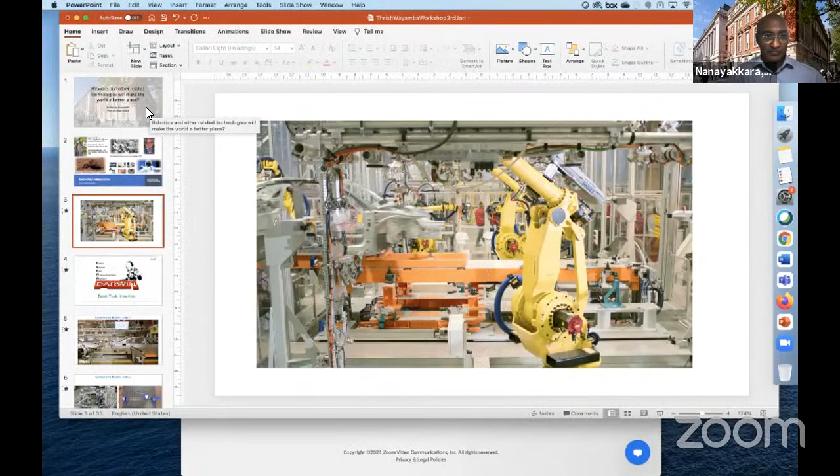It's great to be here to talk to school students in Sri Lanka. It's always a pleasure and a privilege to do that kind of thing from outside Sri Lanka. Congratulations to the Royal College Science Society for organizing this event, and being very generous to share this with other students in Sri Lanka. That's a good leadership activity.

So I'm going to talk about robotics, and I'm generally going to talk about soft robotics, which is my field of work. I will give some insights about what is happening in soft robotics these days, and then give some ideas about how you can continue work and studies in that area in the future.

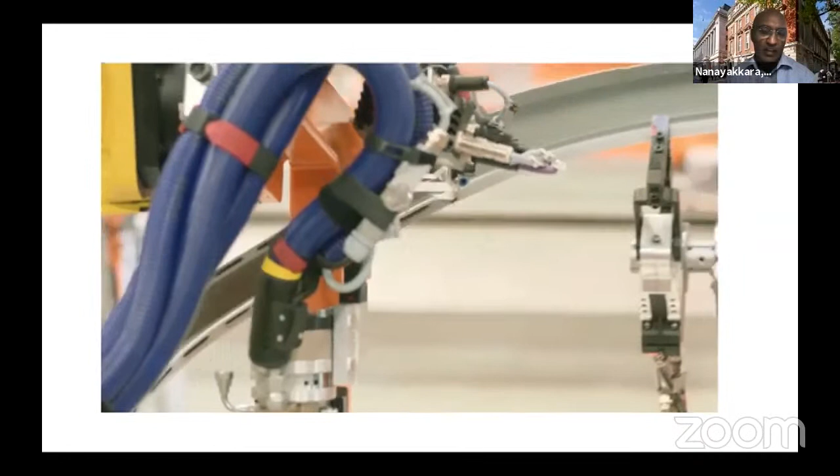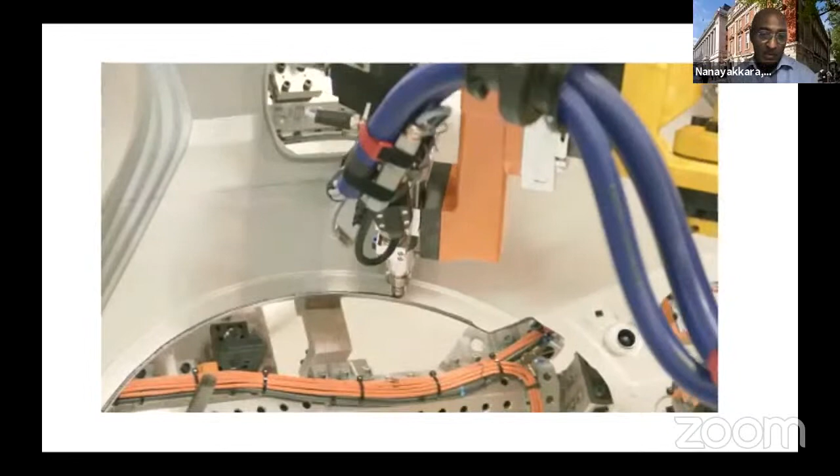So the point here is that there's a demand and supply driven uptake of robots. People need products and services that are calibrated and manufactured according to standards. It doesn't matter how many cars you are making, each car should have the same quality. It is true that handmade items are expensive, but handmade items are expensive when there's no huge need for calibration, right? So like hand looms are expensive, which is great.

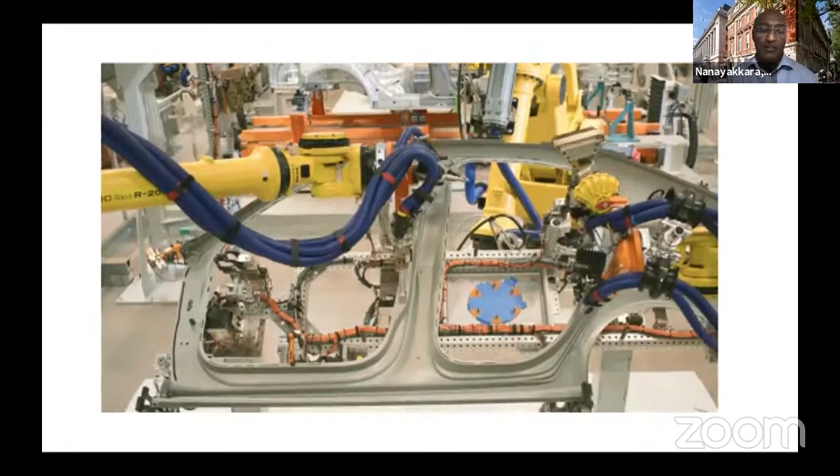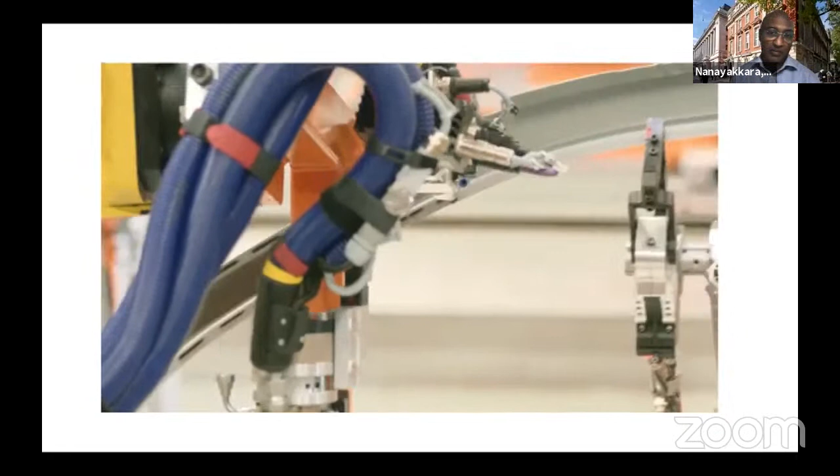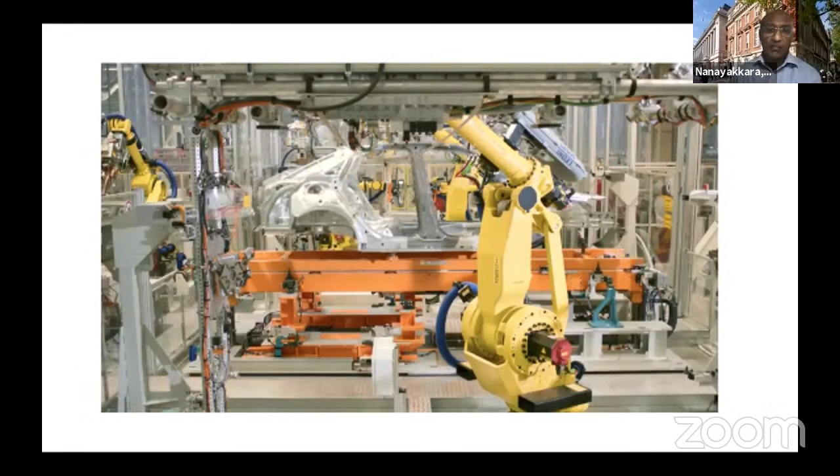These textiles can have a little bit of variation across different products, giving a unique taste and texture to each item they are manufacturing. So that is great. But if it is a car or an automobile, you have to be sure that these things are manufactured to some kind of calibrated standard, and that is why this was taken up in the car manufacturing industry and other assembly mass manufacturing industries more than the others.

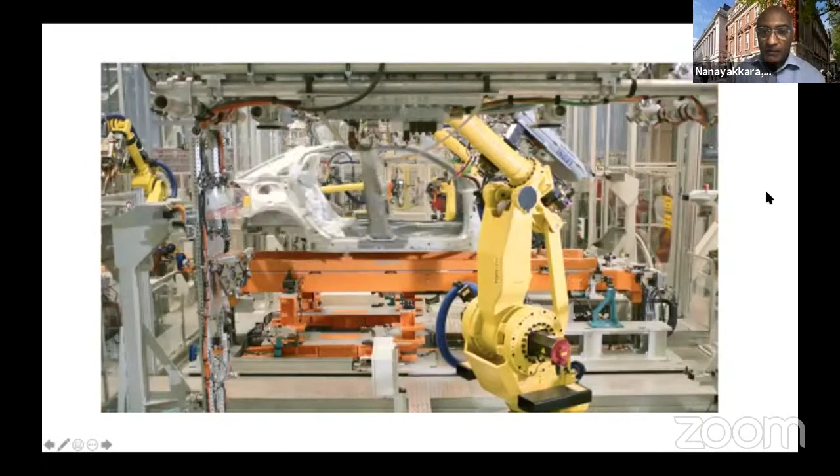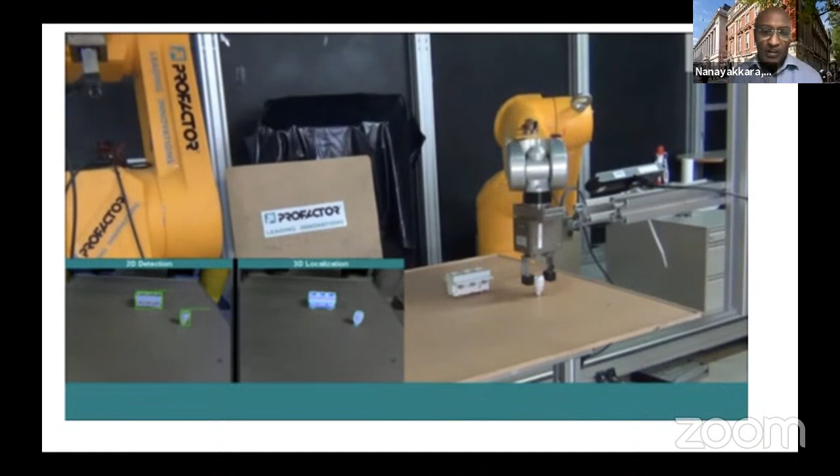But there were drawbacks. So this is one example. In these environments, objects move around, and these calibrations fail sometimes, and these robots have to survive with uncertainty.

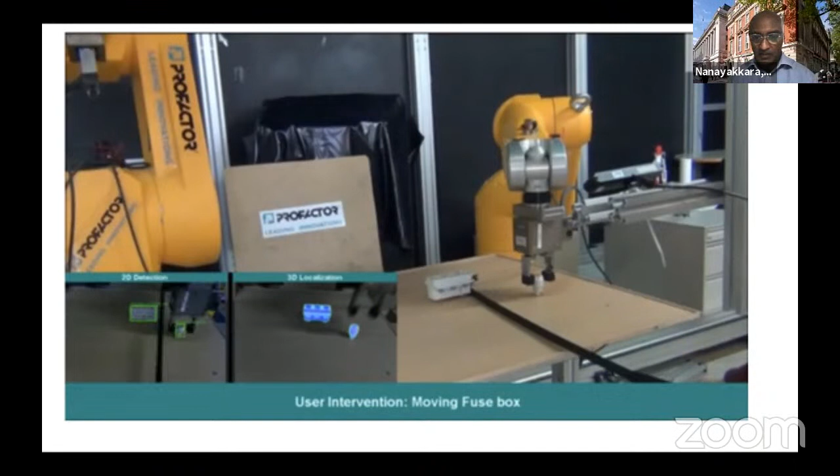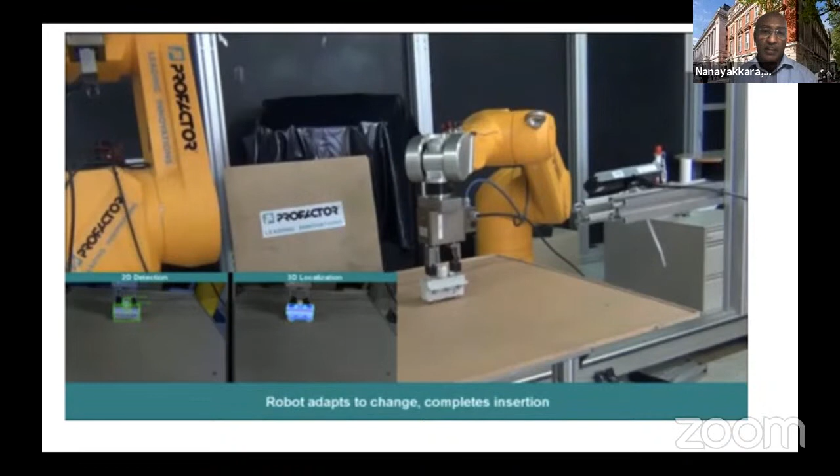This is a European Union funded project I was involved in, done in collaboration with lots of different European partners. The idea is, if a robot picks up something, and somebody moves it, or due to some reason that object moves around, then the robot should be able to recover, recalibrate itself quickly, and get the thing done. So this is like extending their intelligence a little bit.

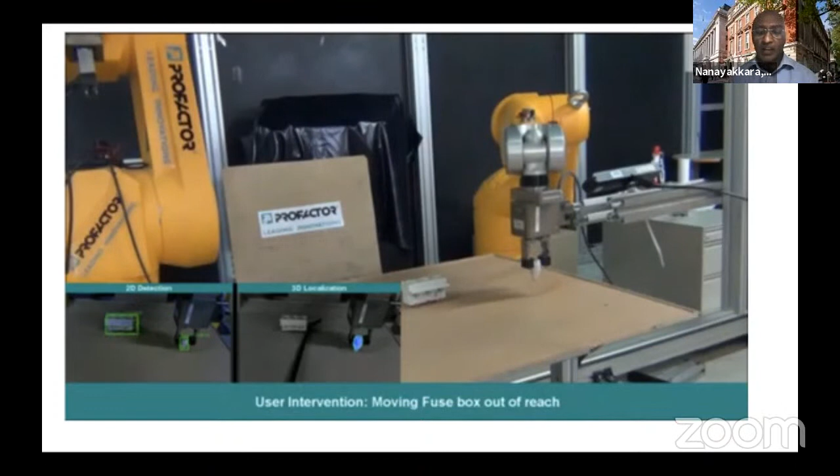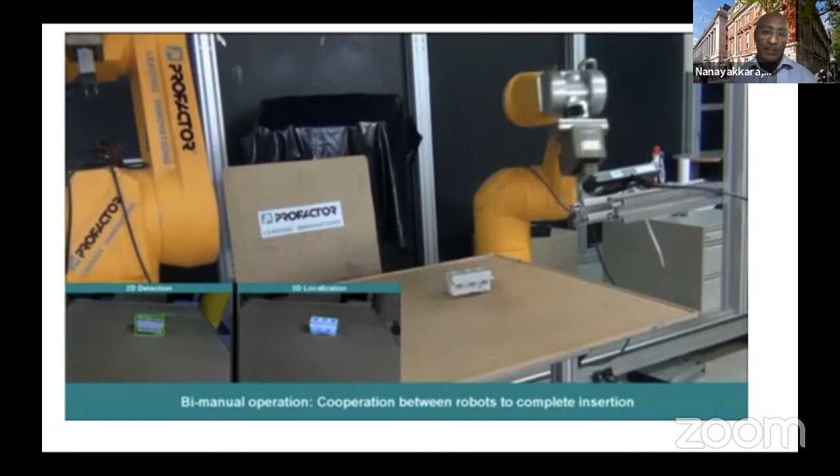So what happens if the object is moved beyond recovery, to a bigger distance where the robot either cannot reach or cannot accurately calibrate? Then another robot, a buddy robot, can come and help them. This is more collaborative intelligence, one robot understanding the difficulty of his colleague robot, and responding in an adaptive way. So this is how we push the boundaries, the state of the art.

So this was a research project, but it was adopted in the industry. This is the latest kind of incarnation of these robots, called cobots. The cobots are collaborative robots. It is purposely not called robots because these are collaborative robots, and these joints are safe.

So you can have humans working around them, and these robots can collaborate with humans and other robots. This allows humans to come in and do more tailor-made, customized interventions, while the robots can continue to do their work and easily recover from different uncertainties. So they have what are called series elastic actuators.

So you can see, compared to the first video, this video shows humans working around robots. This is really needed because this human touch is really important in any manufacturing task. They have to do ongoing quality assurance, quality testing. This man is coming to check if the robot has done the job right, and they can do certain interventions that the robot cannot do, or just help the robot to recover things and do the task better.

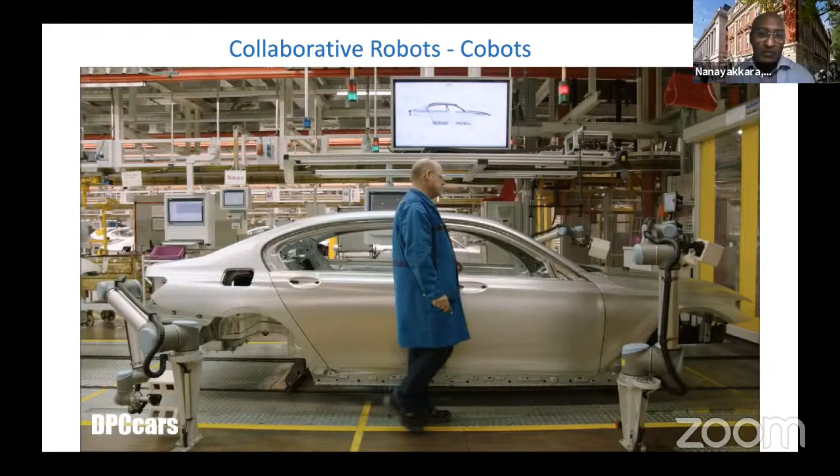So if that laborer was doing some mundane work like nut fixing or polishing, why not get this robot employed to do that work? Then you recover the cost of the robot in one year, because you were anyway paying the person $20,000.

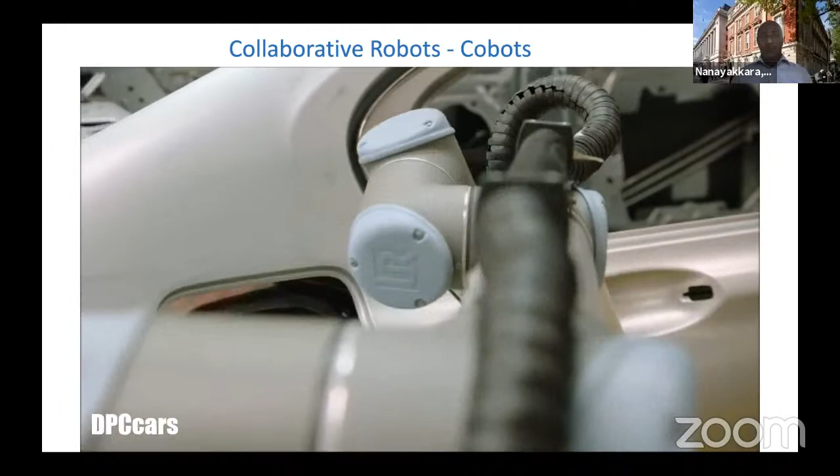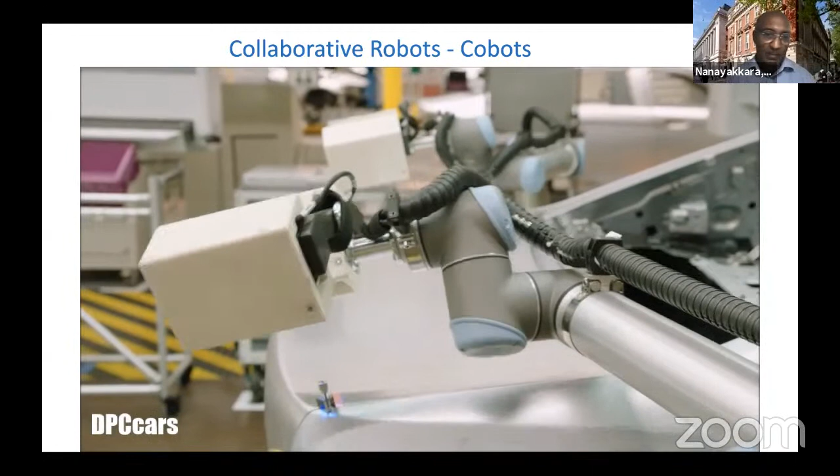This can appear to be that these robots are replacing low-end workers. There's an ongoing debate about it. But the thing is, there are not enough workers to do this kind of job, so the industries cannot really depend on labor mobility to sustain manufacturing and agriculture.

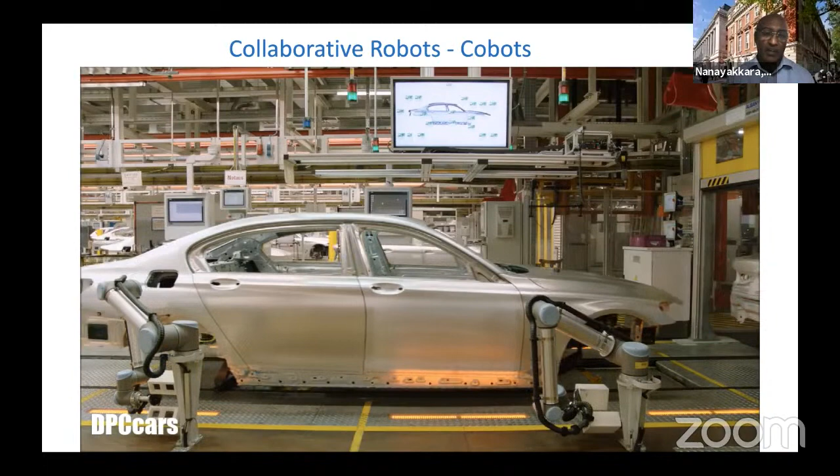Most European countries, UK is experiencing that kind of problem. This is not just agriculture, the strawberry pickers and apple pickers - there are not enough people to work in those industries. And recently we experienced a driver problem, the truck driver problem.

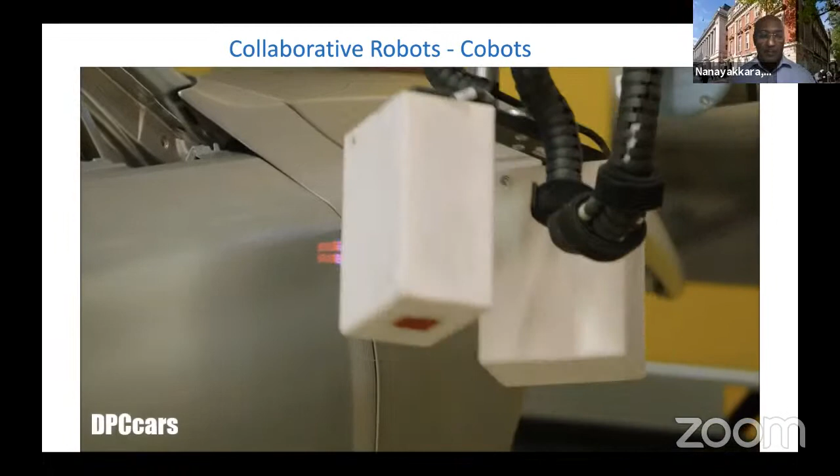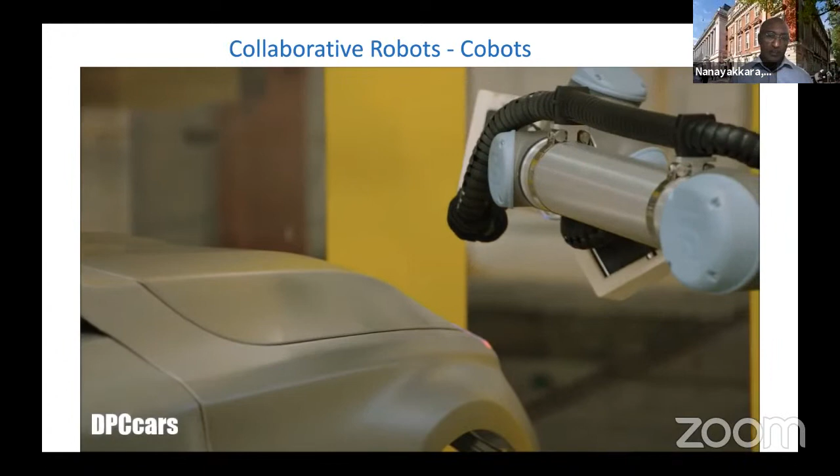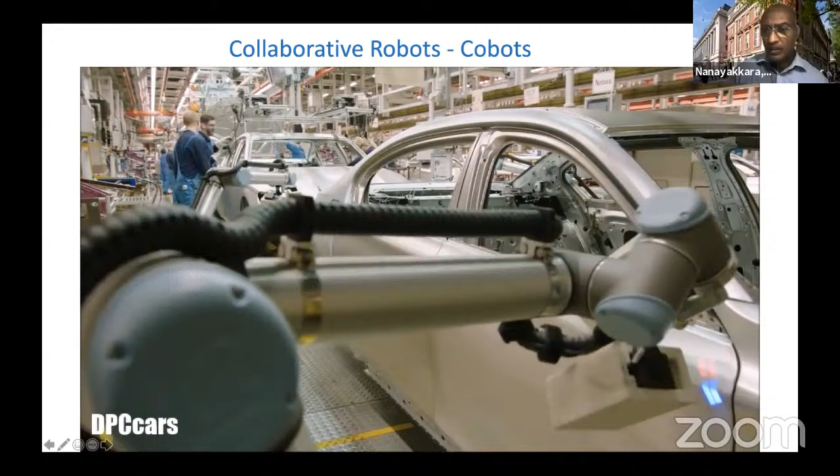That lack of people to work in those industries creates the demand for autonomous driving or cobots. So it is not like robots replacing humans, or creating joblessness, or taking human jobs - it is not really that. It is that there are not enough people to work in those industries, and the robots are coming to serve that demand. That is something I really wanted to highlight.

So these robots have, as I said, series elastic actuators. There's basically a motor, and it is connected with springs to the load, and then you can just push the robot - the robot is not going to push you back too much.

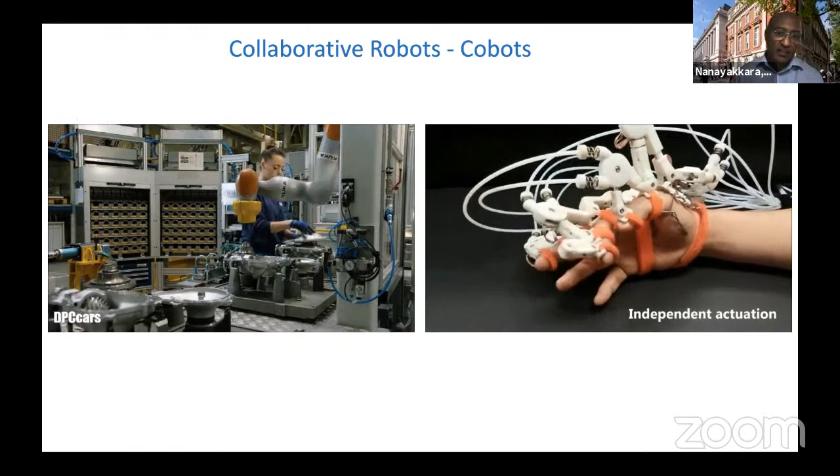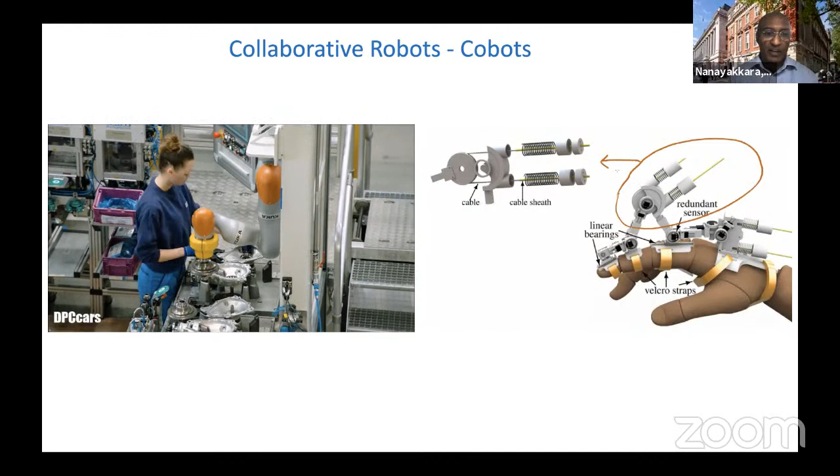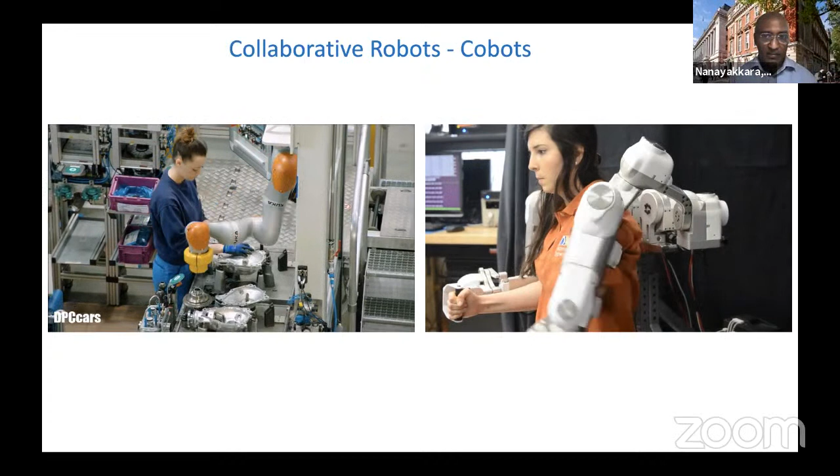You can see that lady is working alongside that robot, that KUKA robot, which is a cobot, and she is feeling very comfortable working around that robot. She's not even looking at the robot. The robot is helping her pick things and placing things in the right orientation so she can just do the final fitting or reorientation.

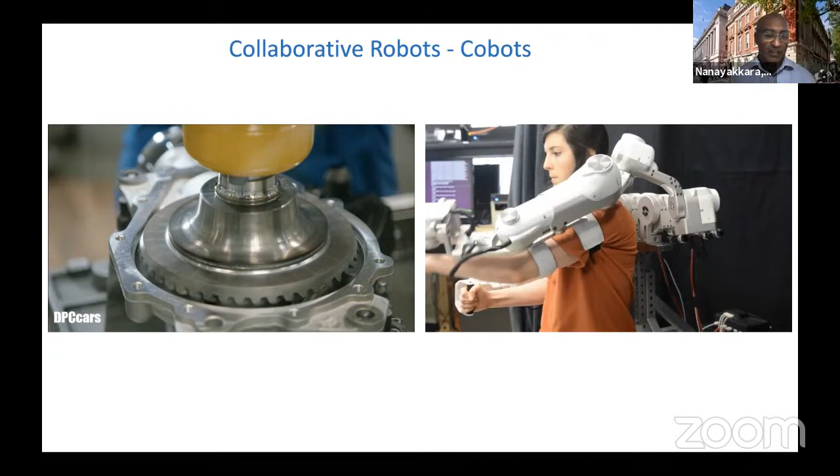This is massively increasing the efficiency of her work, because she doesn't have to lift heavy objects. The robot is lifting the objects and doing the repetitive things, and she is doing just enough work to get it done - that last bit of human touch.

So this is the state of the art, and it is laboratories like mine and lots of other laboratories across the globe who are pushing the boundaries of this technology. So it is our job.

Lots of companies are being spun out every year from different universities. For example, Imperial College London has spun out at least 16 robotics companies so far, and it is continuing. Our research, at some point, we do fundamental research, and at some point it comes to maturity, and then it goes out as a company.

There are lots of elevated floor houses in the UK - these houses are elevated, with a gap between the ground and the floor, for insulation purposes or for heat and other problems. These are relatively old houses that didn't have good enough thermal insulation. This robot can go underneath those floors and do a proper calibrated surface insulation. You cannot send a human underneath - the gap is so narrow, and it is not a comfortable area to work in. And the chemical they are using is not very good to be around a human.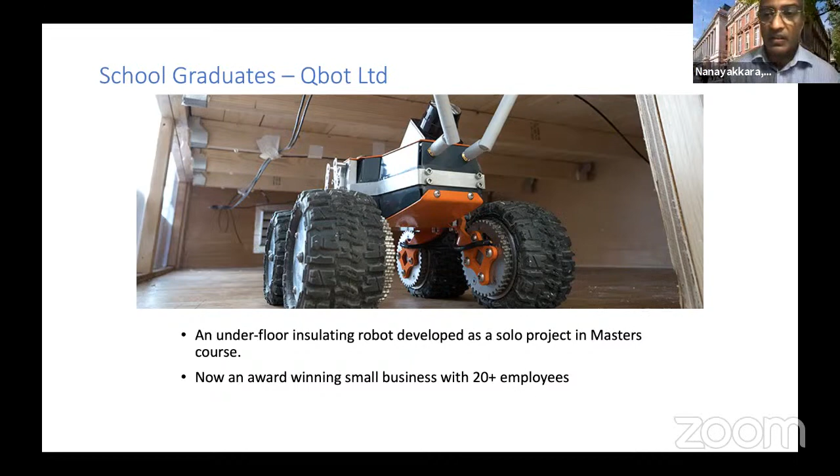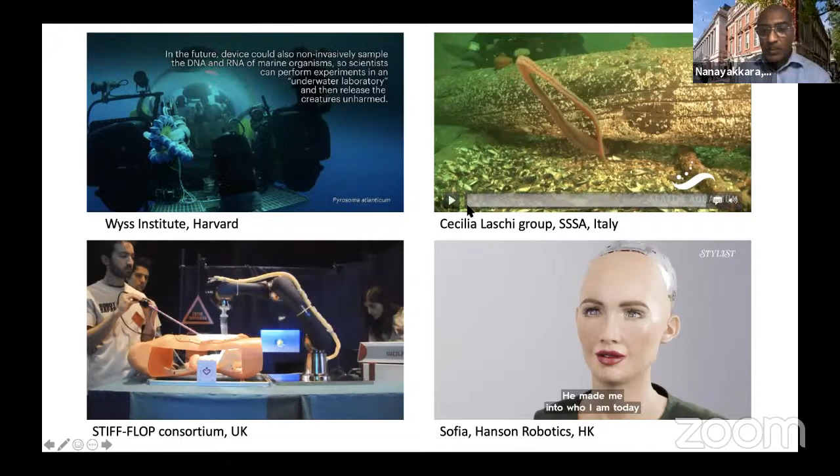So the soft robotics field is a fascinating field. I'm involved in that, my research is on soft robots. The soft robots are mostly motivated by, inspired by, soft animals like the octopus. The octopus can have tentacles, and these tentacles can be stiffened, and they just do lots of different things under the sea.

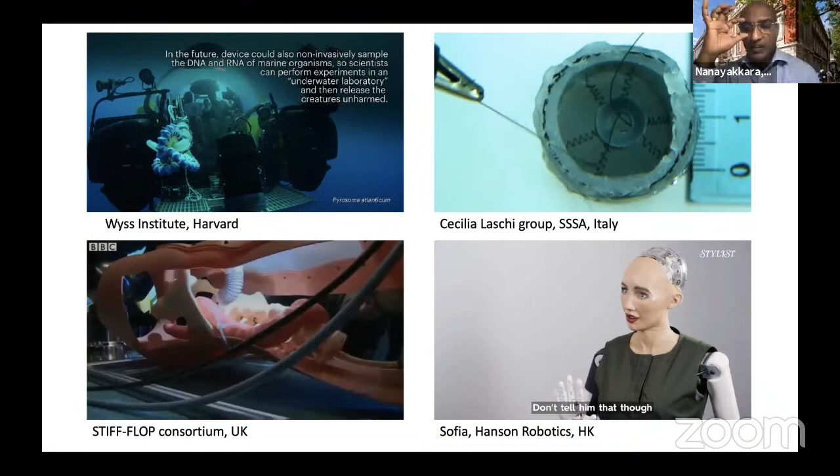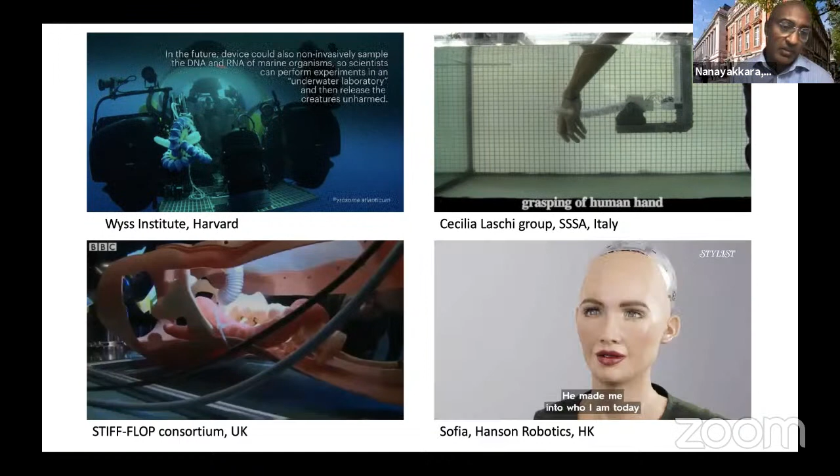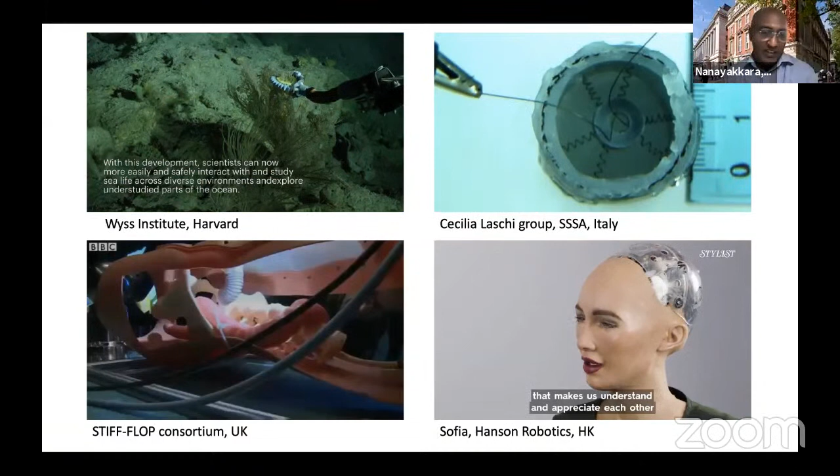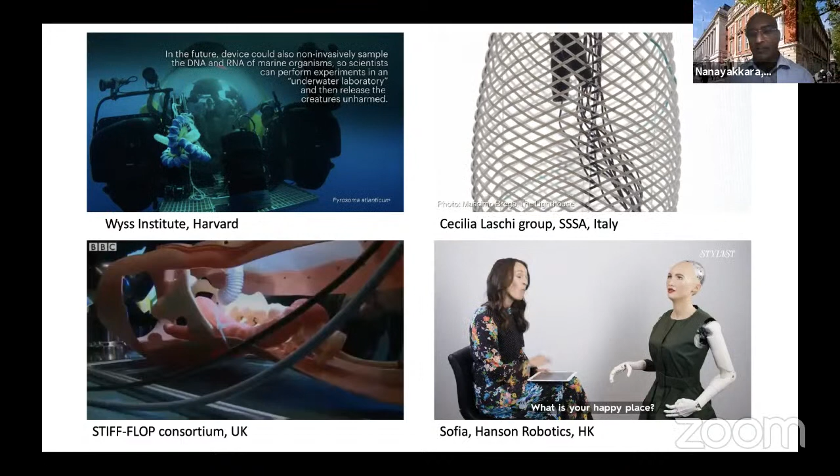So the hope is that for those listening to this talk who are school students, by the time you go to university and come out of the university, maybe in about 4 or 5 years time, you will be in a society with lots of opportunities in robotics, with lots of companies around and different opportunities to work.

So the essential thing is that you need to be very good in mathematics, you need to be very good in physics, and then you need to know your coding—software skills.

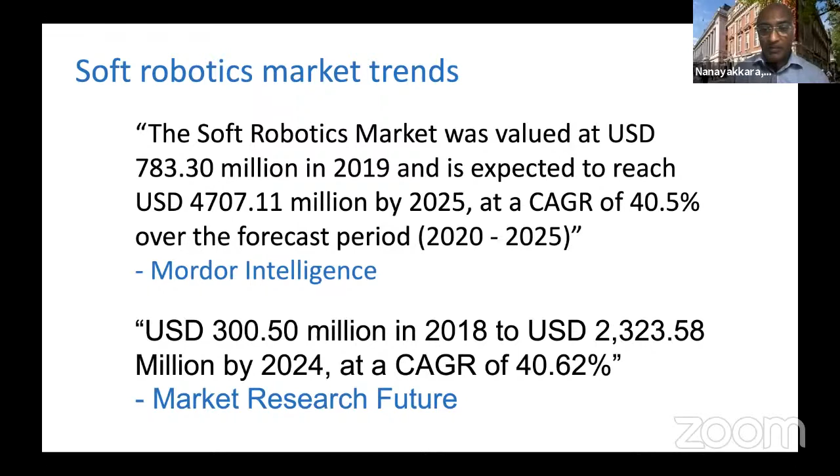Within the Imperial Robotics Forum altogether, we have current ongoing funding of about 50 million pounds, 64 patents, and 16 robotics companies coming out, plus lots of other scientific activities. So just to give a quick run through about the soft robot laboratories, starting with George Mylonas's lab.

His lab is working on minimally invasive surgery, especially gastrointestinal surgery. His robots can go in the gastric tract and do intestinal observation and surgery. He is developing soft robotic anchoring - cylindrical anchors that can go into the intestine or gastric tract, mostly the intestine, then inflate and latch onto the inner surface, and the robot can go through that anchor to do the surgery.

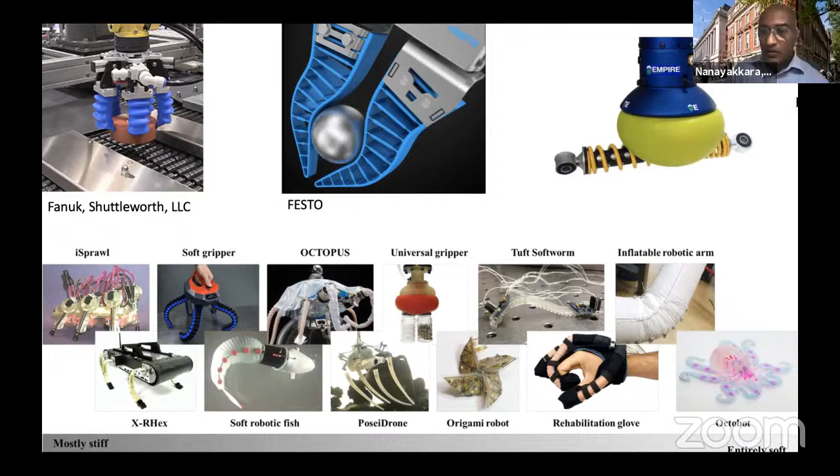These odd-shaped objects cannot really be calibrated, so the advantage of soft robots is that they can just wrap around the objects - you don't need a huge plan, calibration, or complicated program to handle them. For example, this robot is just a soft sack of granules. You push it against an object, it passively wraps around that object, then you suck the air out, which freezes that shape, and that becomes your grip. This is one example - the MIT robotic fish.

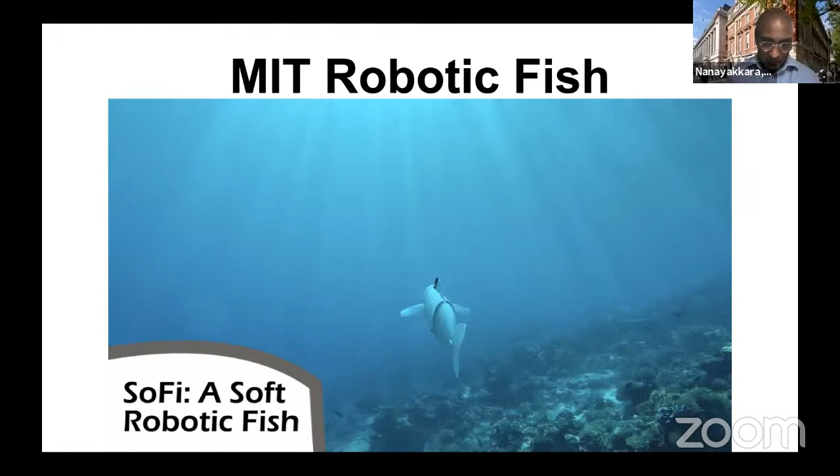This robot is tethered and remote controlled. Just to be clear, it is not fully autonomous.

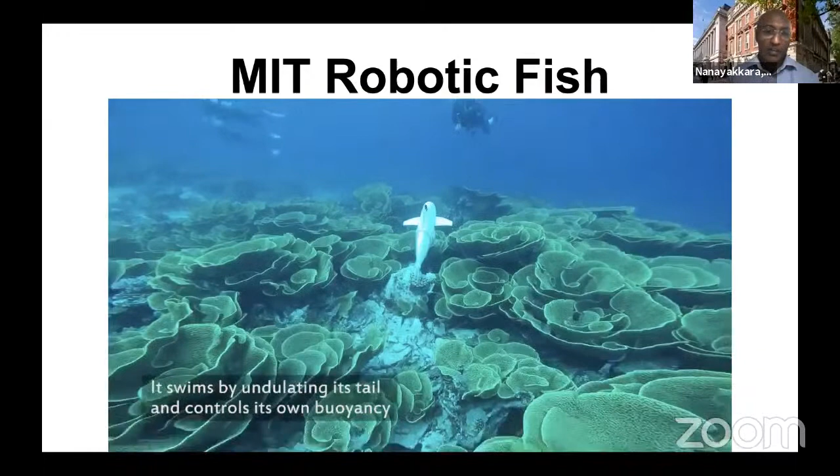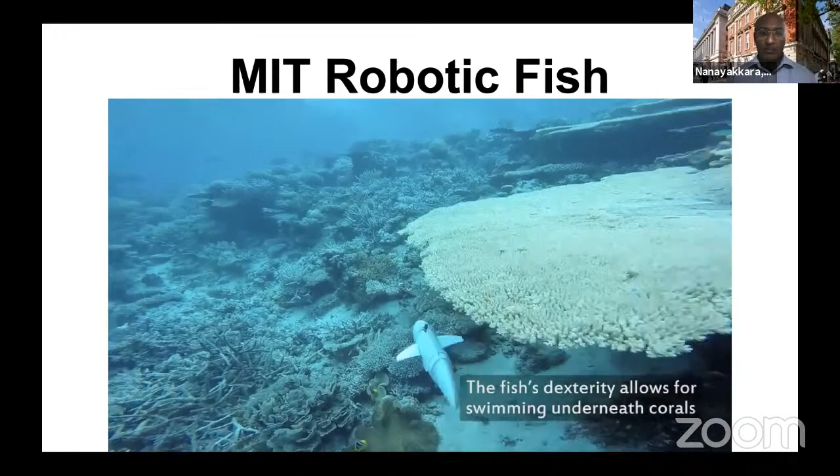These kinds of robots can be used for underwater resource monitoring or pollution monitoring. I think in Sri Lanka they could even be used for underwater tourism, taking nice videos underwater to promote tourism, monitoring underwater resources like seaweed, and even helping fishermen locate fish. There are lots of things you can do with these kinds of soft robots.

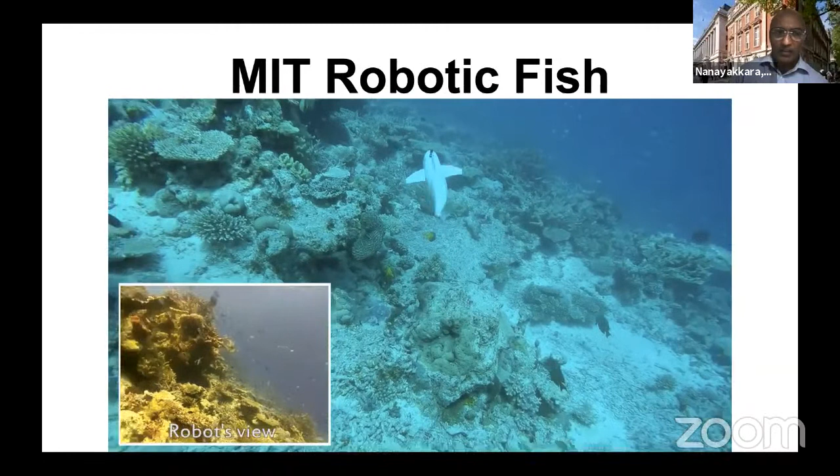We went to this hospital, and they have so many farmers coming in with wrist injuries. So they apply this kind of orthosis to restrict the wrist. But when the farmers or patients go home, sometimes they develop pressure points, because the skin and fat layers grow, but the orthosis remains the same, and that creates these pressure points.

These are really uncomfortable, especially after several weeks of wearing it. So the idea was to develop a soft sensor skin underneath that can monitor this kind of pressure point development. We designed it so the sensors are located in the statistically highest pressure point development areas under the hand.

So we took data from patients, went through a lot of complicated steps, and developed this special soft sensor.

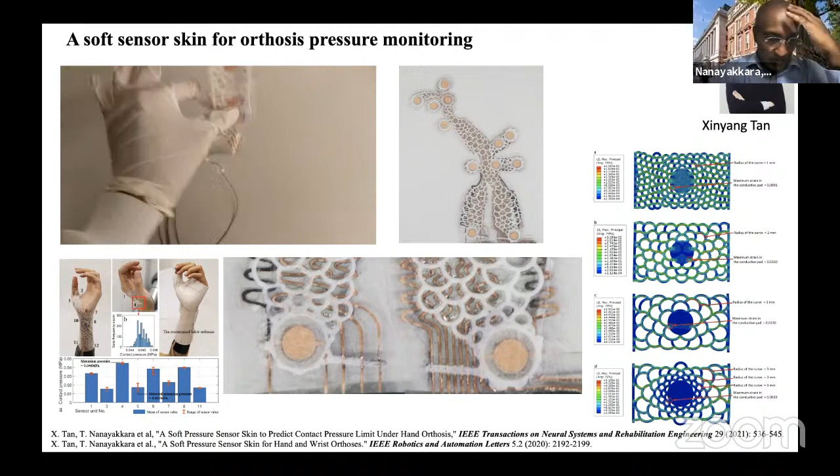The next step is to remotely send a command signal back to the orthosis, which has a thermal coil. Because this material is a low temperature melting point thermoplastic, you can warm it up to a comfortable region, not dangerous to human skin. Human skin is about 36-37 degrees Celsius, and you can go up to about 40-45 degrees without damaging it, and just release that pressure. But we haven't done that yet, so that's the next step.

This is Sara Adela Abad Guaman. She also finished her PhD in my lab. Her work was to understand how mountain goats survive on mountain cliffs, and to see if we can get inspiration to develop robots that help farmers do farming in very hilly environments. She is from Ecuador, and wanted to help Ecuadorian farmers that way.

But we went back to the very fundamentals to understand how these animals survive on those cliffs. The idea was that it may not be the brain doing the job.

If you think about it, the signal from the hoof to the brain takes about 120 milliseconds to reach, and any calculations in the brain take about 50 to 100 milliseconds. Then the primary motor cortex has to send commands down to the muscle fibers to move, and those commands take another 100 to 200 milliseconds to reach and amplify in the fibers to make any movement.

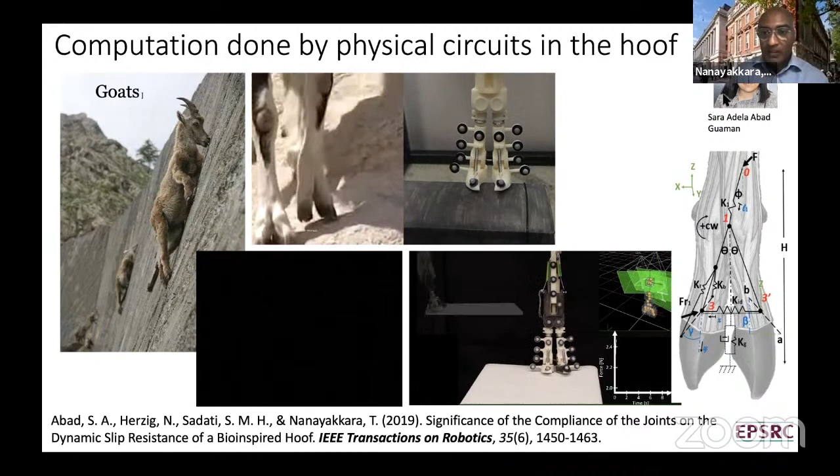It's very interesting to notice that even humans, when they want to brake on ice, like Julia braking on ice — the friction coefficient between ice and those blades is fixed, so friction coefficient alone doesn't explain how she's braking. She is implementing a goat-like hoof with her hip joint — she goes down a little with bent knees, then rotates the hip and ankle joint to create a physical shape that looks like a mountain goat hoof.

This is a behavioral implementation of the same thing, and the goat hoof is an evolutionary implementation of the same principle. So the principle remains the same, and there can be multiple different implementations. That is one thing I wanted to highlight.

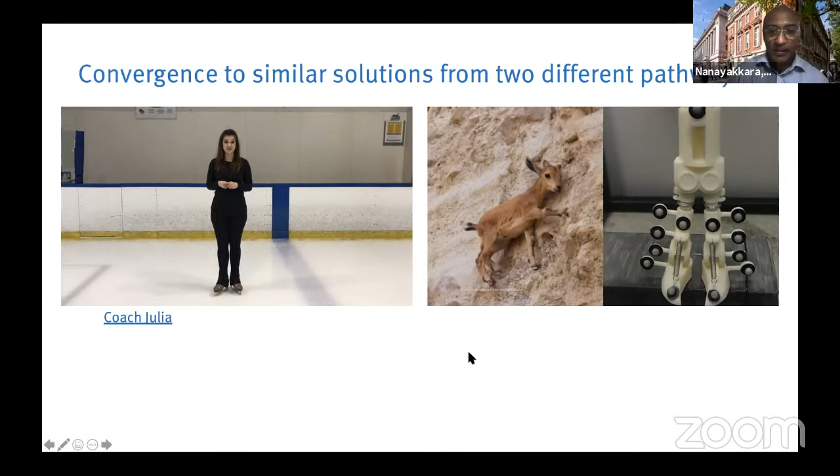So another PhD student, Elham Hamid, tried to understand how our knee joint is solving problems. The hoof was solving the problem of slip reduction, and our knee joint is solving another very complicated problem: noise reduction, right?

You might have noticed that when you ride a bicycle on bumpy, wild terrain, you wouldn't stay seated — you come off the seat and ride with bent knees, and your thigh muscles pull together in what we call co-contraction, implementing some kind of mechanical filter.

Filters are things seen in electronics and mechanics — the name implies they filter out unnecessary noise. So what the brain does is implement a mechanical filter at the knee joint, so the knee joint takes care of filtering out the bumpiness of the terrain, so the brain doesn't have to deal with that. The brain can just keep riding the bicycle, while in the background the body solves very complicated problems of self-stabilization — and that way the brain solves it.

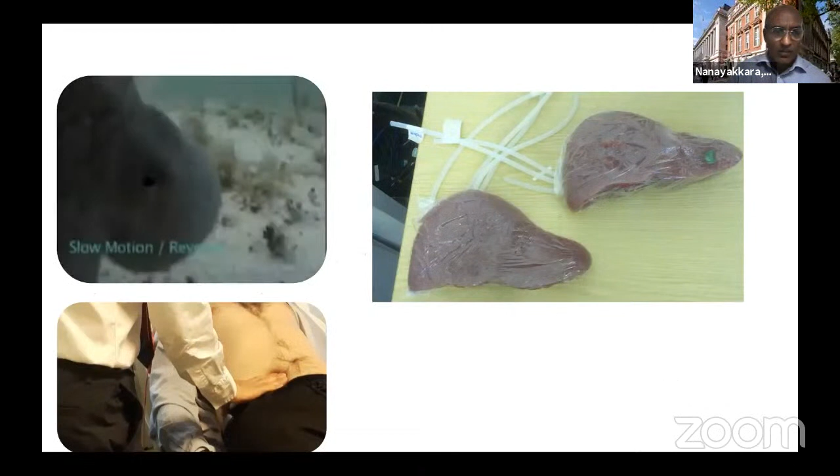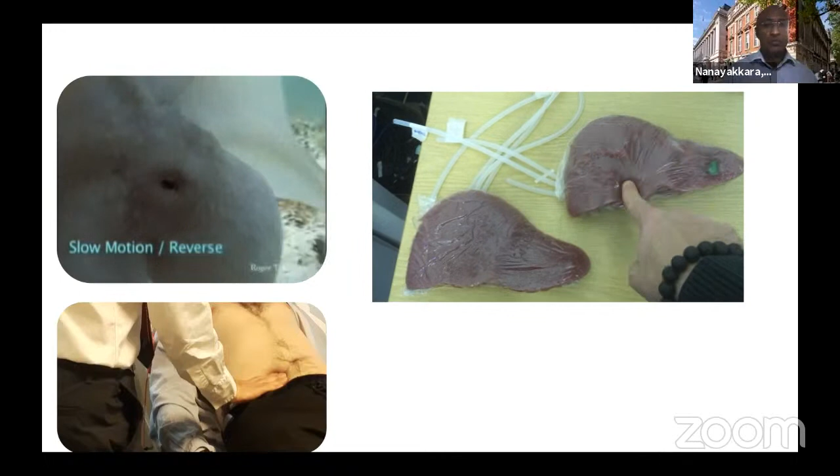Another project I'm involved in is this Robo Patient project, about a dream of having a robotic patient in the hospital, so that we can use that robotic patient to teach medical students how to examine a patient. In the far distant future, we want to project a patient from home to the hospital physically, to a robotic body. So you have your human body at home, and you're sick but don't want to go to the hospital, so your physical body can be projected to the robotic body, and the robotic body will try to camouflage your body and present it to doctors.

This inspiration is coming from the octopus. You can see this octopus, see how it camouflages itself.

See how this octopus is camouflaging itself to seaweed. Within a few seconds, it is becoming a seaweed. See how that animal could camouflage. So we want to do the same kind of camouflaging in a robotic body.

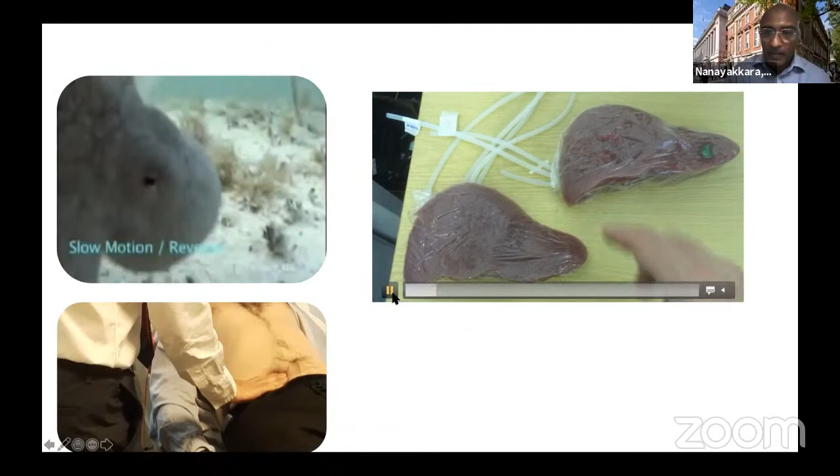So we are developing these robotic organs that can change their stiffness, change their shape, create fibrosis conditions and cancer conditions, and various types of conditions can be created using a computer algorithm.

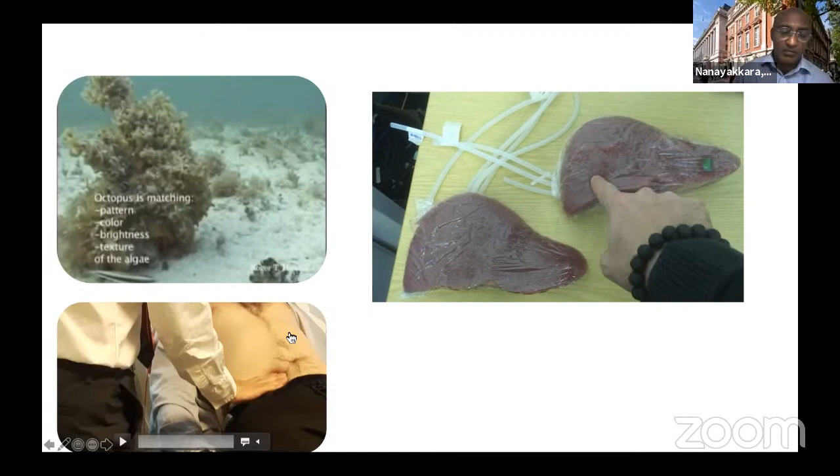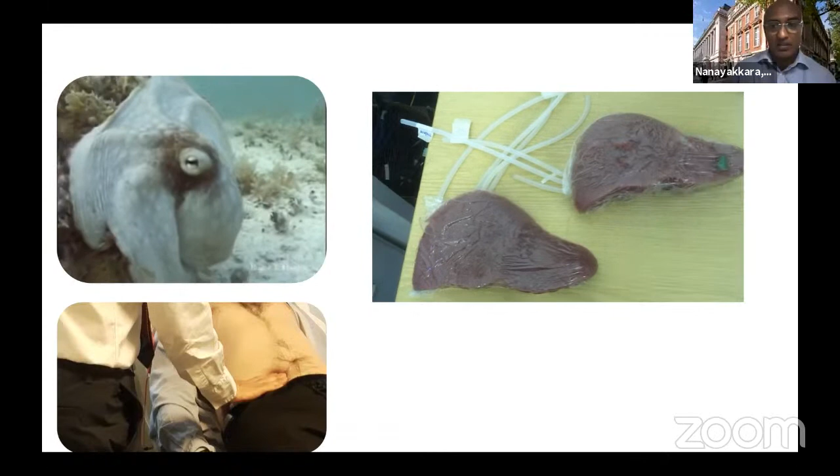The idea is in the future to be able to wear some kind of jacket that scans the human body, identifies some parameters in the physical body and organ conditions, and projects it to the robot in the hospital, so that GPs or doctors can examine the robotic body now camouflaging your body, and make some basic diagnosis first.

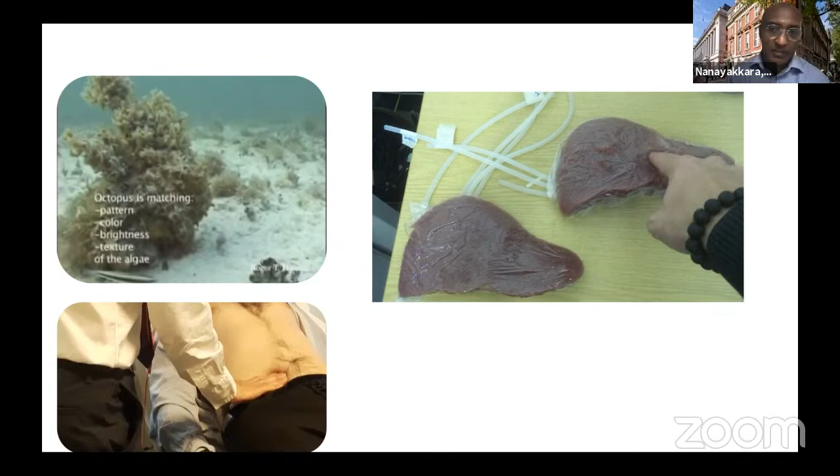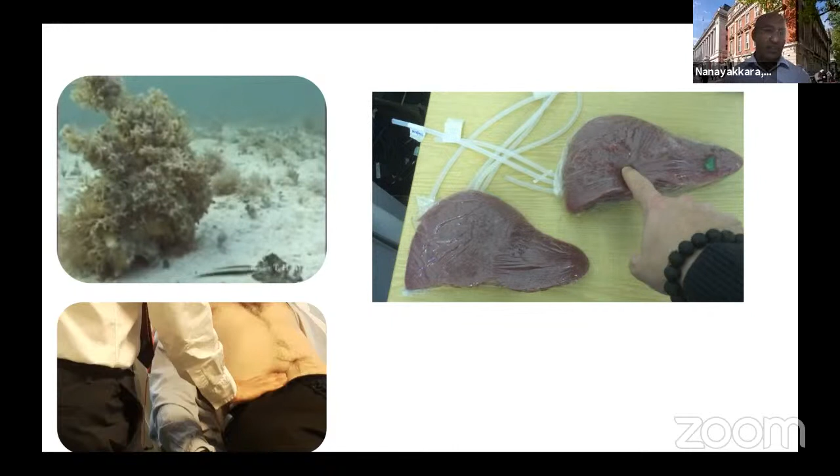The other advantage is your physical medical history can be archived in a physical, tangible format, so when you go from one country to another, you just carry your history of parameters. Any doctor can upload those parameters to a robotic body in the hospital and go back and forth through your history in a few seconds. How your body felt a month ago can be felt just in a second, because that is physically archived now.

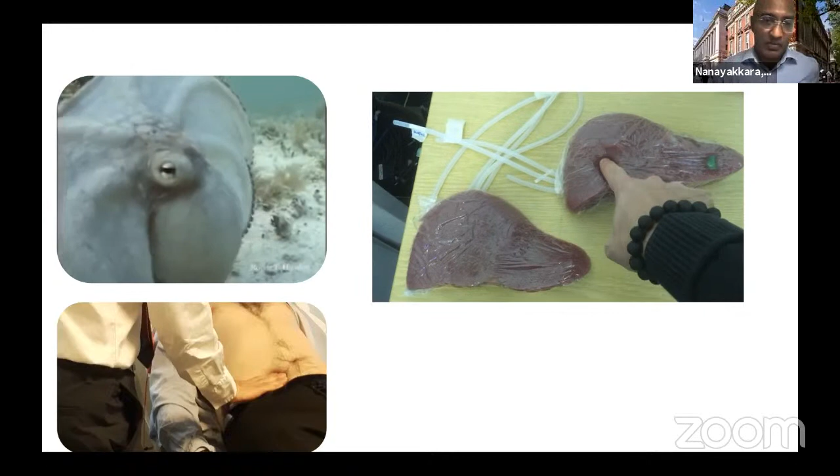This is a project I'm leading with multiple partners, medical partners at Oxford University Radcliffe Hospital and University of Cambridge, and I'm leading this from Imperial College London.

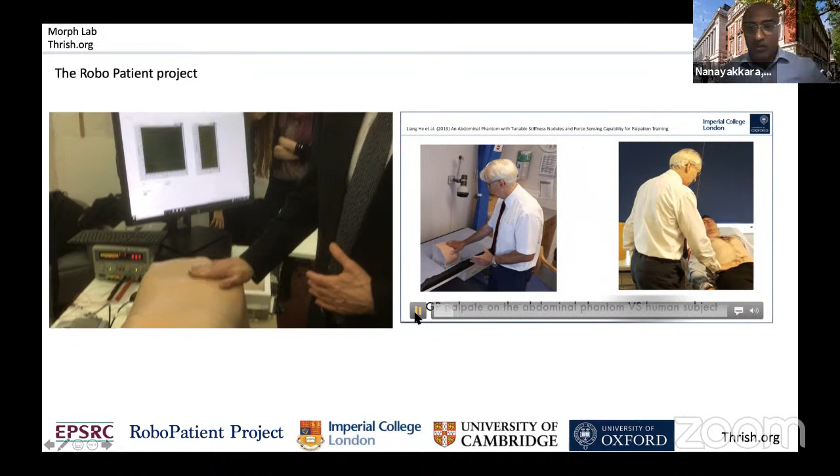We are working with GPs and general practitioner trainees these days. This is a GP examining the robotic patient, the current version, and we are getting feedback from them on how they examine our robotic patient, and we monitor how they use their fingers.

It's not simple - they use various different types of examination techniques. The robot is monitoring how the human is examining, and that archived data can help medical students, because students can compare themselves with how an experienced GP would examine the robotic body, since the robotic body can display how they interact with the patient.

This project is trying to have the same robotic face that can express pain as a black male, a white male, a white female, or an Asian male or female. So the head can go through structural changes to change.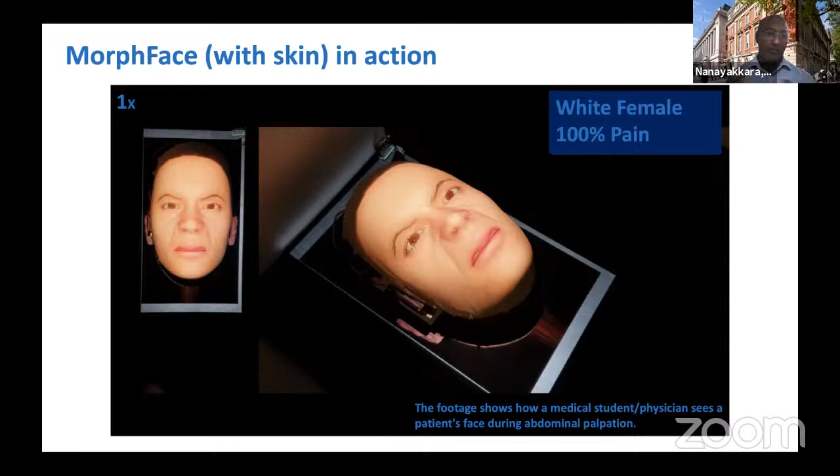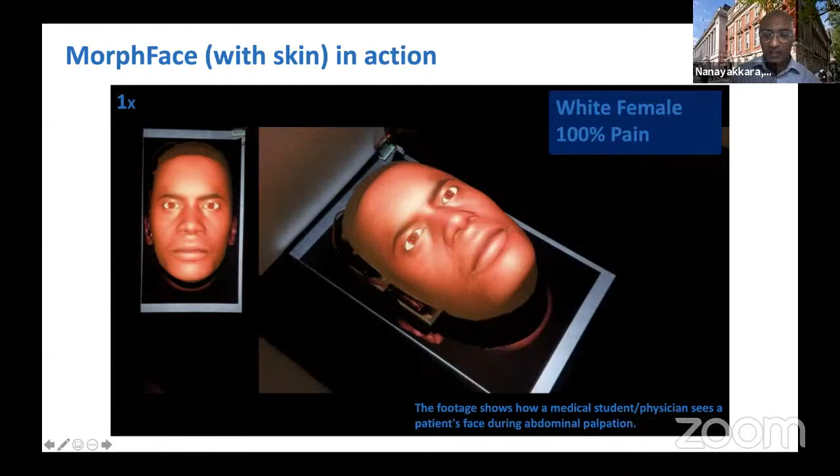We take multiple images from different ethnic backgrounds and calculate some kind of average face, then look at facial parameters like width and height, and where the eyebrows are located, and simplify it down to about 4 important parameters. We call them principal components - the 4 principal shapes that really define your facial identity.

And then that way we can go from one ethnicity to another. The important thing is we know the exact mathematical map from the force you are applying on, let's say, the abdomen, painful area, to the pain level. So it remains the same. But when you express that same pain level from different ethnic backgrounds, we see that different people understand it in different ways depending on your own history, your gender and your ethnic background.

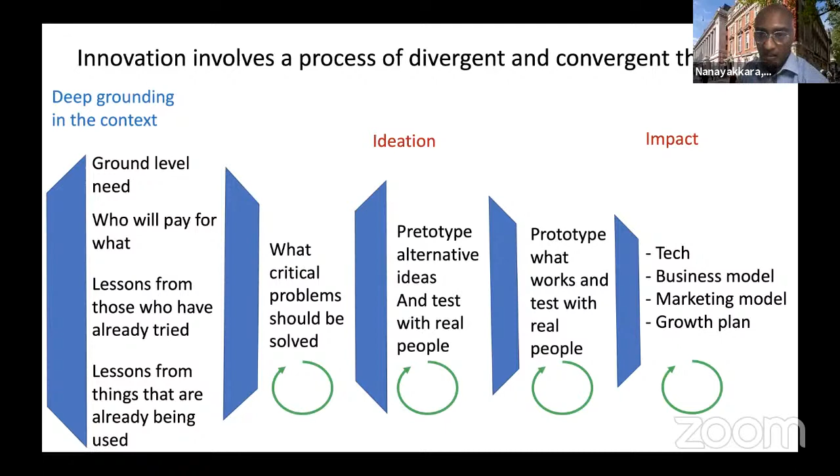When the breadwinner, the male, has an injury, the females have to struggle a lot because they have to fight on so many fronts - the economic fight, the security fight, and everything. So we wanted to do something to contribute to solving this problem of landmine detection.

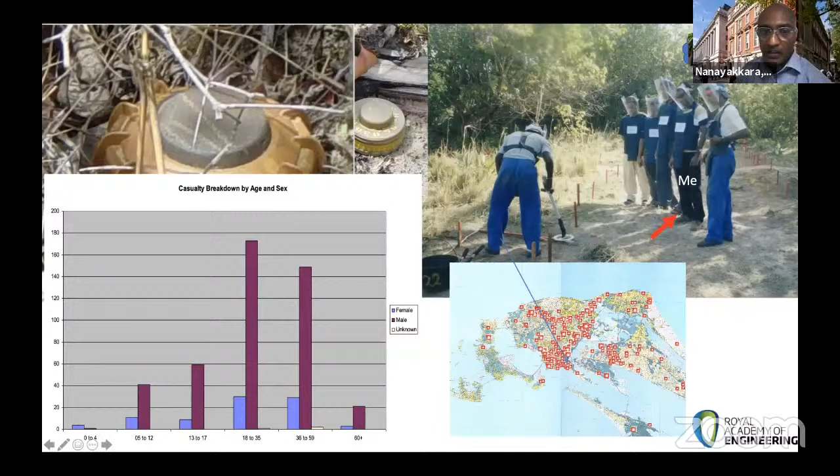This is the lowest technology you can use - gardening rakes. This technology is like metal detectors that give about 90% false alarms. Every time you get a false alarm, you have to stop and dig, and mostly discover it's a bullet case or a shell fragment or a nail - it is not a landmine. So 90% of the time you're just wasting time.

Ronco was using dogs, which is great, but these were imported dogs from outside Sri Lanka, and given the climatic conditions, they fall ill. When they catch a cold, they had to be laid off for about a month at least. Some other people used flails, which isn't so good for the terrain, because if you remove the topsoil layer, the next rain can wash out the fertile soil, and then you're basically left with limestone. Farmers cannot return to do farming on that land because it's just barren.

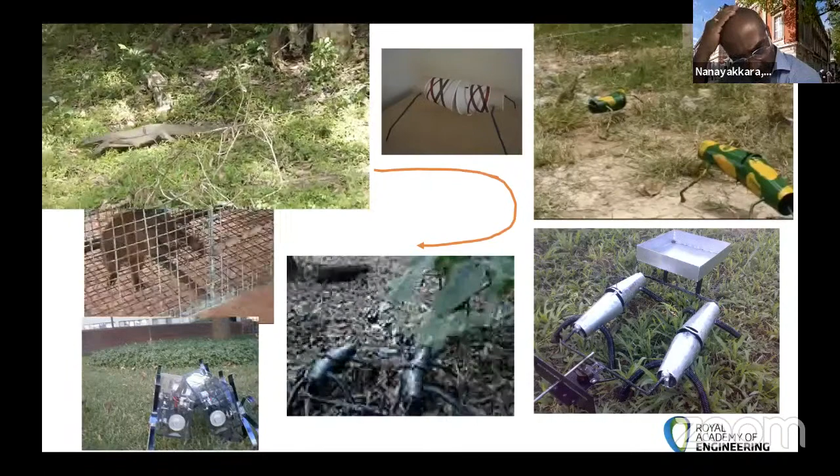The first was a paper cup model, and then our robot was tested in the grounds of University of Moratuwa. We trained a mongoose at the Mattegoda camp, the army camp with the Engineers Brigade of Sri Lanka. We were successful in this training, so it could finally learn how to sniff for landmines. Then we wanted to guide this mongoose—mongoose in Sinhalese is Mugatiya—with this robot, so the robot guides the mongoose in the minefield to detect landmines.

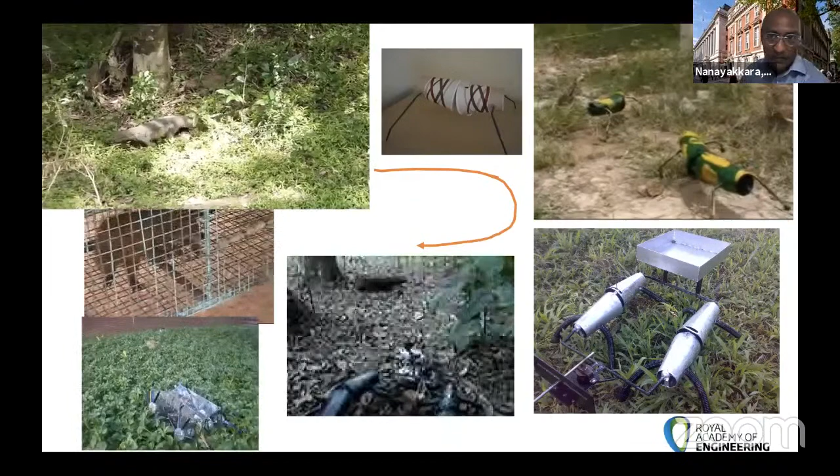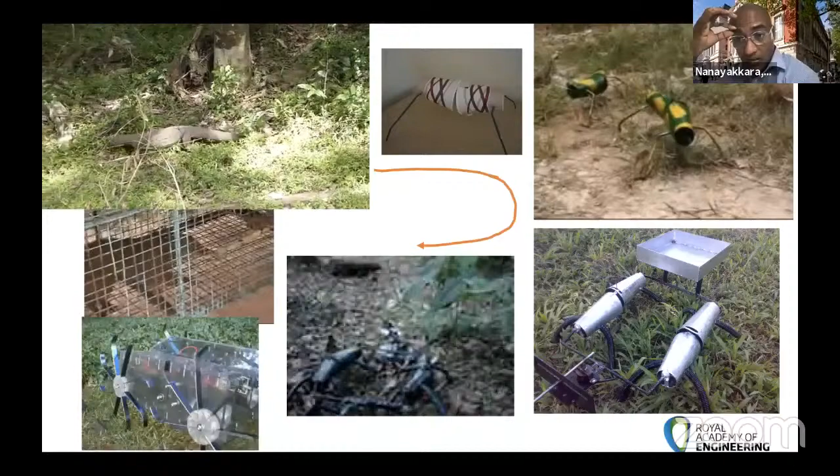These robots were made out of rescued, recycled material—paper. The motors were literally wiper motors, and everything was recycled material from junkyards. That was the first kind of recycled robotics in the world, and it went on from there.

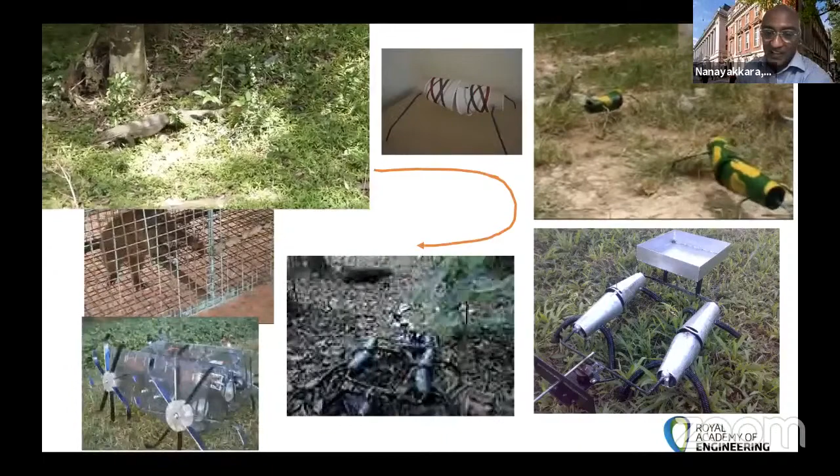That's another story, how we took this approach suited to Sri Lanka. We published our work and gave these ideas to the General Sir John Kotelawala Defence University to continue. I left Sri Lanka in 2005-2006 and went to Harvard University, where I continued this work.

I met a Sri Lankan student called Lahiru Jayatilaka. He and I continued to work on this, and he went on to launch his own company. Now it's a US-based, California-based company, selling these products to the United States Army, US Special Operations Command, US Army Europe, and the Joint Improvised-Threat Defeat Organization.

That company is called Red Lotus, redlotus.com, Red Lotus Technologies. It's a very successful company now, providing this equipment to the US Army and I guess other armies around the world, saving lots of lives in different countries.

The journey started with visits to Jaffna, talking to these people, lots of sleepless nights. We slept under the stars in Jaffna—we didn't have a place to stay, so sometimes we slept outdoors, and it was beautiful. When you wake up in the middle of the night, you see stars and realize you've been sleeping outdoors. That was just before the war erupted again.

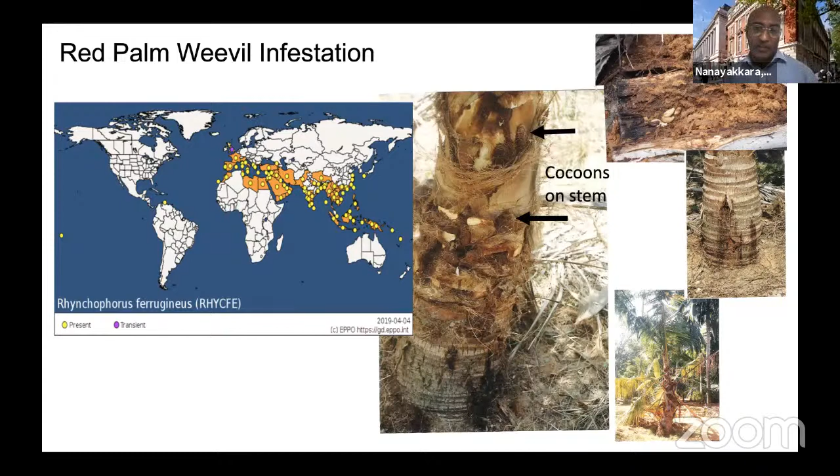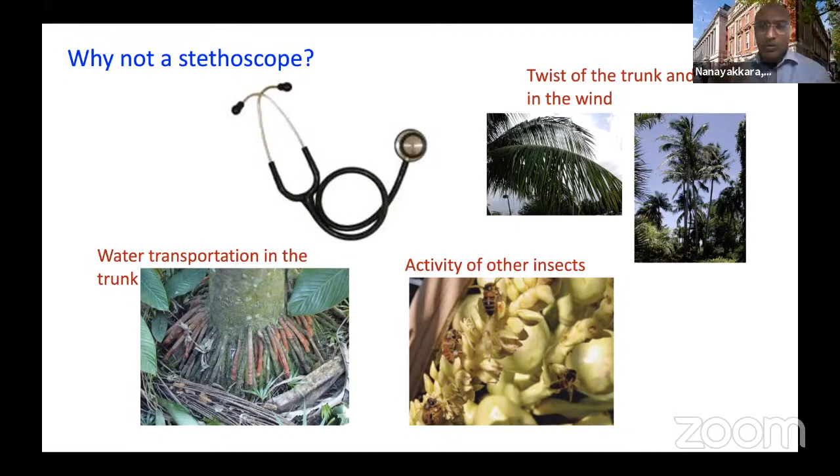We wanted to develop some kind of solution which has not been possible before, because if you look at the sounds of the insect activity, it is very similar to bees sucking honey, water transportation up the cambium of the tree, or twisting of leaves in the breeze. So it's very difficult.

We developed a new sensor which is inspired by how the human cochlea works in the ear, and then we developed a mobile phone app that solved the problem. This is the best sensor in the world.

I spun out a new company called Permia Sensing, and that company is now selling this product, and soon this will be available in Sri Lanka. We are now testing with growers in Mexico, India, Malaysia, Indonesia, Israel, United Arab Emirates, and Croatia. So it will come to Sri Lanka at some point.

This can basically boost up about 10% of Sri Lankan coconut production, and save money for farmers.

The story behind that is a bigger story. I'm just the technical side of it, and there were lots of people who helped us, who are on the board of directors - business people, marketing people, legal people, and lots of different people. Imperial College London is fully behind it, investing money into it.